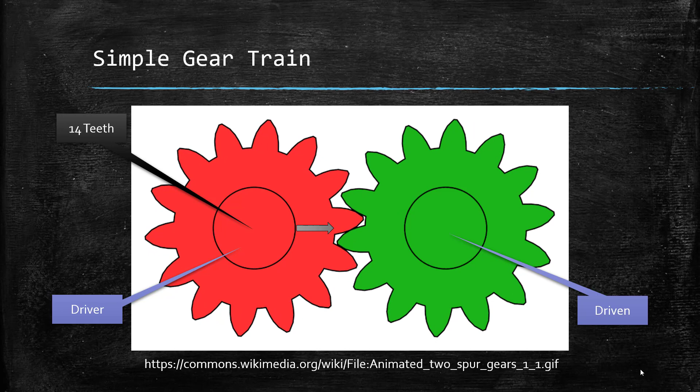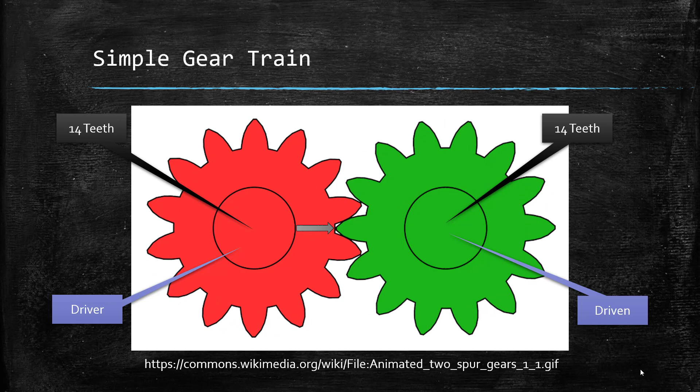Now, in this case, you'll notice the two gear wheels are identical. So the green gear has 14 teeth as well. So 14 teeth pass that point on the red gear, and 14 teeth pass that point on the green gear. So in this particular situation here, the two gear wheels are turning at the same speed, because if 14 gear teeth pass on the red gear, 14 teeth also pass on the green gear.

Now, the other thing I'd like you to notice is with this particular gear system, the two gears are turning in opposite directions. The red is turning clockwise while the green is turning anti-clockwise. Now, that's going to be important later when we talk about idler gears.

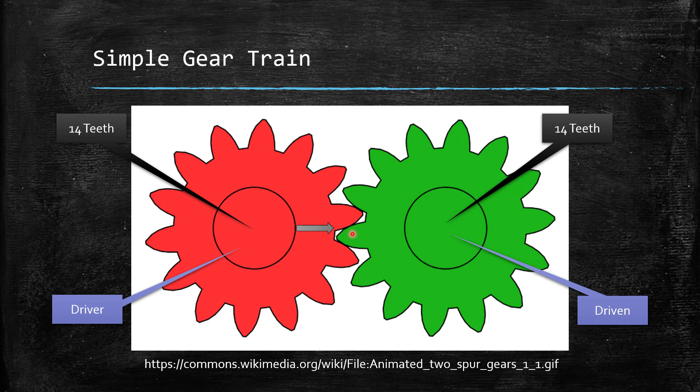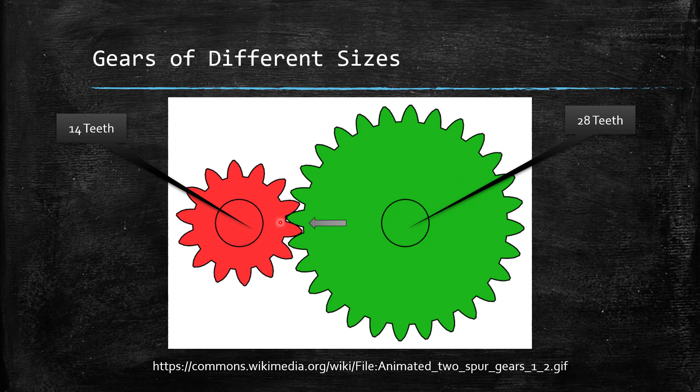Now, if we look at a more common situation where our two gear wheels are of different sizes, this now brings in a little complication. The red gear again still has 14 teeth, but you notice the green gear is significantly larger, and in this case has 28 teeth. Now, we're going to do the same exercise again. We're going to look at one specific point on the gears. Now, for one full revolution of the red gear, again, we're going to have 14 teeth passing that point.

Now, here's the problem. In the green gear, we still only have 14 teeth passing that point, because there's only 14 red teeth for one full revolution. So if I want the green gear to go one full revolution around its axis, I need 28 teeth passing that point. And for 28 red teeth to pass that point, the red gear has to rotate twice. So in this case, every time the red gear rotates twice, the green gear only rotates once.

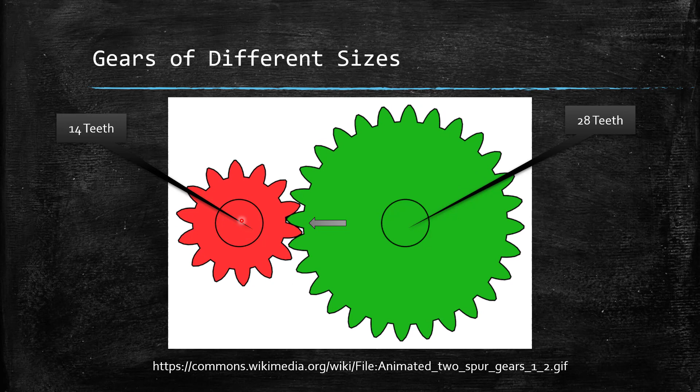So the smaller gear always rotates faster, and that is a handy rule of thumb when it comes to looking at equations. The smaller gear is always faster. Now, let's have a look at the equations. Now, we're going to look at our two gear systems we've looked at so far, and that is the two gears the same size, and then one gear different size to the other. Now, the equation is going to be the exact same for both.

Our gear ratio is the number of teeth on the driven over the number of teeth on the driver. The driven is always on top when we're looking at gear ratios. So, if we take our simple gear system, you'll remember the red gear has 14 teeth, the green gear has 14 teeth. So, we have 14 over 14, which gives us a gear ratio of 1:1. Now, what this means in reality is that every time the red gear rotates once, the green gear will rotate once, and they're turning at the same speed.

Now, if we look at our second one, it's the exact same equation, so the number of teeth doesn't matter. This time, however, our gear ratios are different. There's 28 teeth on the driven, there's only 14 teeth on the driver. So our final gear ratio here is a ratio of 2:1. So a ratio of 2:1 means that the red gear has to rotate twice for the green gear to rotate once, because the green gear has twice the number of teeth than the red gear. So our ratio here is 2:1, or a ratio of 2.

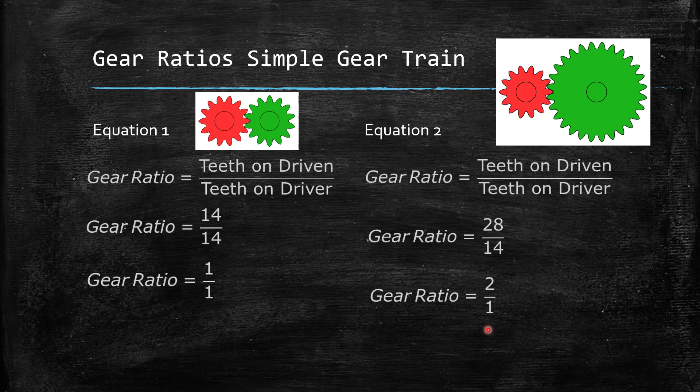Now, I've mentioned idler gears. Now this is important. An idler gear is simply a gear that is put between the driver and the driven. So again, our red gear here is the driver.

Our green gear here is the driven because it's the output. Our idler gear sits in the middle between the two. Okay, what does that mean in real terms? Well, we have 14 teeth on the red, we have 28 teeth on the blue, we have 42 teeth on the green. Now, if we take our arrow again and we look at this point here,

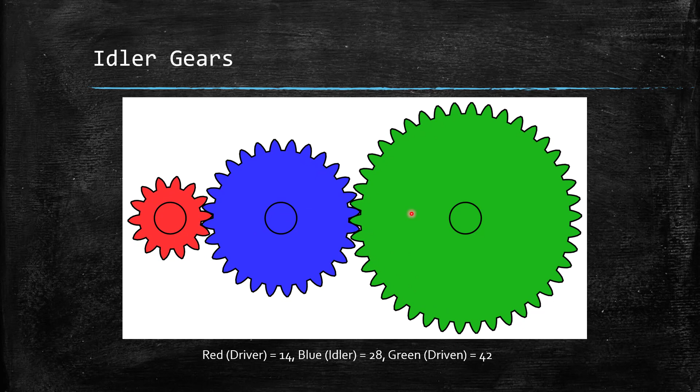let's say our red gear rotates once, well, that means at that point there, 14 teeth are going to pass that point. Now, I move around to here, I still only have 14 teeth passing that point because it's linked to the red gear, which means my green gear still only has 14 teeth moving. So in other words, you can actually ignore the effect of the idler gear. The idler gear that sits between the driver and the driven makes no difference to the gear ratio between the driver and the driven. And we can see this in the equation.

So for our gear, we have the teeth on the driven over the teeth on the driver. We saw that there are 42 teeth on the green gear, there are 14 teeth on the red gear, giving us a gear ratio of 3:1. That means if I want this to rotate once, my red gear has to rotate 3 times, my blue gear will actually rotate 1.5 times. That's what that basically means for this to work out properly. Now, if you're a junior cert student, that is as much as you need to go. For leaving cert, you need to look at compound gears.

One last little thing about idler gears. Both the red and the green gear are turning in the same direction. That's the other thing an idler gear does. If there is an odd number of gears, the two, driver and driven, will always turn in the same direction. If I added in a 4th gear, the driver and the driven would actually turn in opposite directions. So if there's an odd number of gears, driver and driven are in the same direction. If there's an even number of gears, driver and driven turn in opposite directions.

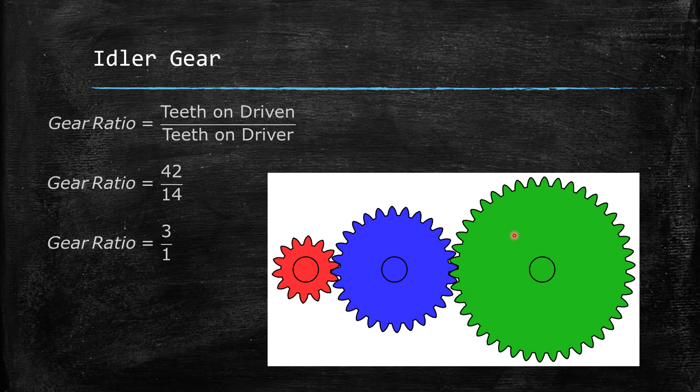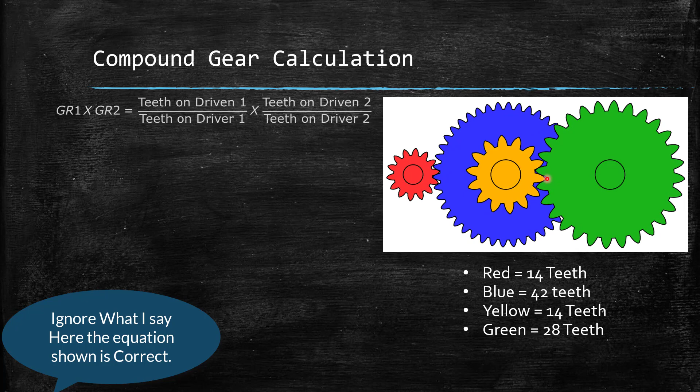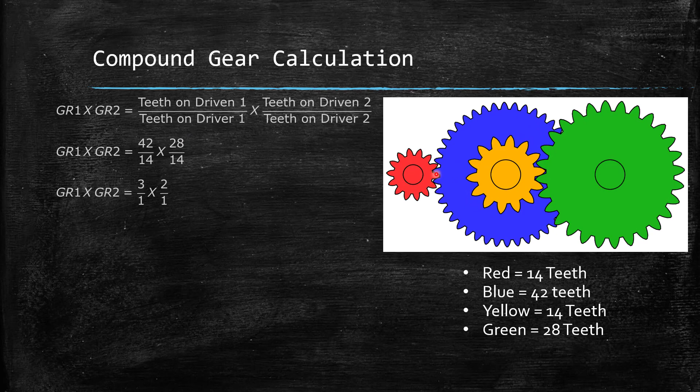So let's have a look at what this looks like in real terms. Our gear ratio here is 42/14 multiplied by 28/14. Now this is a nice handy calculation. They won't always be that handy or that straightforward. This gives us a gear ratio for our first gear system of 3:1, meaning there's 3 times more teeth on the blue gear compared to the red gear, and then 2:1 for our second one, which means twice as many teeth on the green gear compared to the yellow gear. This gives us an overall gear ratio of 6:1. In other words, the red gear has to rotate 6 times for the green gear to rotate once.

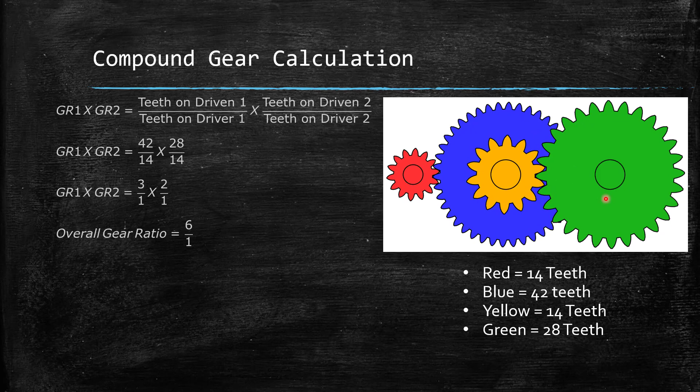Now, you can do it that way, all as one equation. Or you can split it up into 2 halves. Work out the gear ratio of the first system, then work out the gear ratio of the second system, and then multiply those 2 gear ratios together. Why do we use this? It gives us a very large gear ratio in a small compact space. If I wanted 6:1, I'd have had to have 6 times more teeth on the green gear compared to the red gear. This lets us use smaller, more powerful gears compared to normal.

Now, that is it. That's a short lesson on gear ratios. Hopefully that has helped you understand what's going on with them.